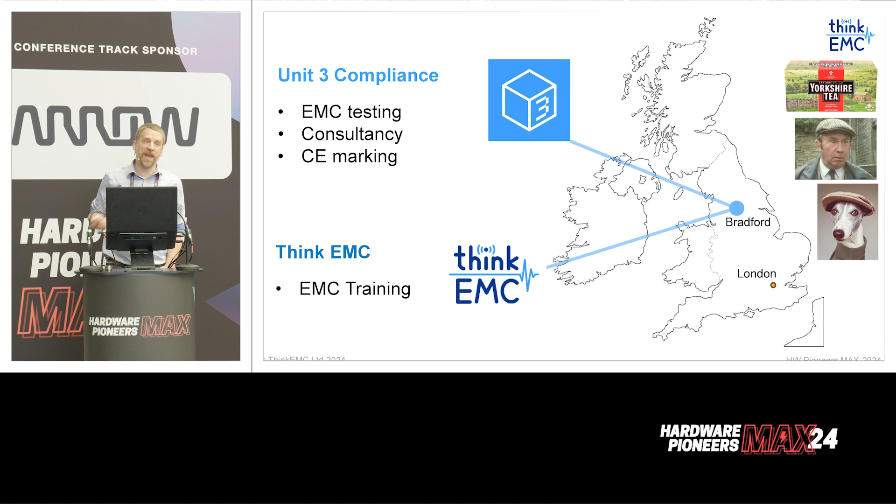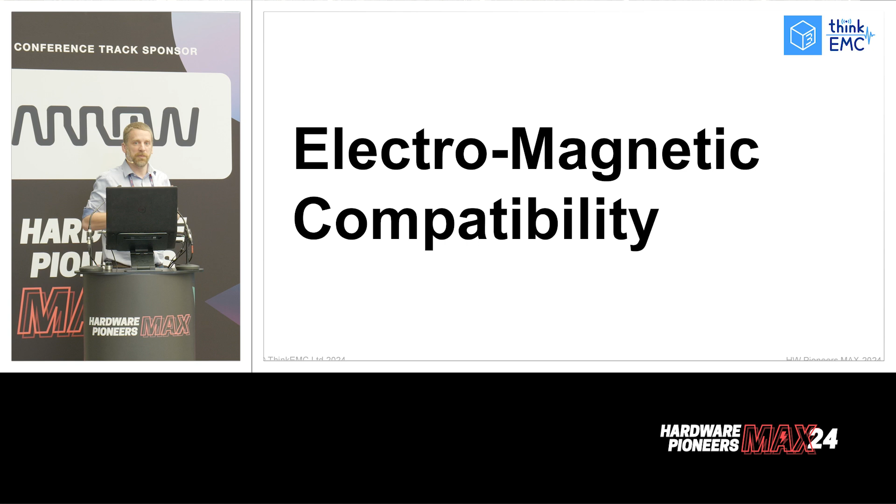I like electromagnetic compatibility. It is by far and away the single best job I've ever had in electronics. It encompasses so much physics, legal, regulatory, product design, compromises, thermal, you name it. EMC has an effect on it, and it will have an effect on EMC as well.

It's a measure of how compatible are products that we make, how compatible are they with the electromagnetic environment that they're operating in. Electromagnetic environments vary greatly between the environment that we're in now, maybe with a few radio transmitters, to, let's say, in a car or on an aircraft carrier. They're very different.

EMC does not stand for easy money consulting. It is the hardest job I've ever had. It also does not stand for end of my career. I'm still working in this field.

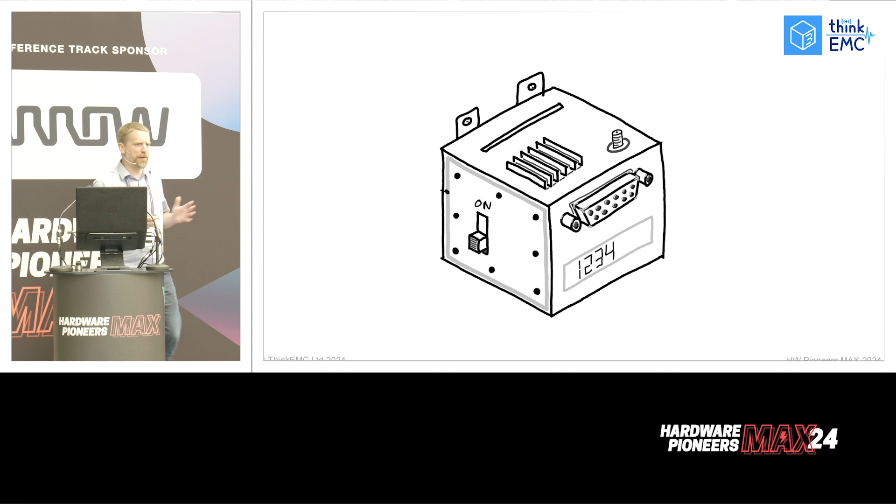We make things. We make things that do things with electronics in, hopefully. If you make things that don't have electronics in, may I suggest you're probably in the wrong talk.

When we make things with electronics in, they have the ability to emit interference, emit noise in the radio frequency spectrum, be it radiated or conducted on cables. And they also have the ability to receive noise in the electromagnetic spectrum. How does our product react when it receives noise? This is the study of the field of electromagnetic compatibility.

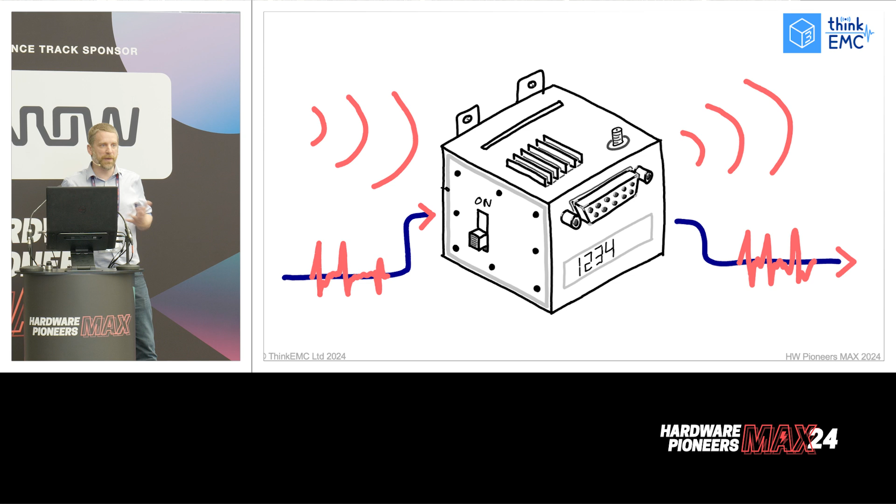We have the potential to cause interference to other licensed spectrum users. Licensed spectrum users like emergency services, amateur radio, air traffic control, space communications, military. Some of these people are going to be very, very annoyed if you tread on their toes. They're going to be so annoyed that they will actively prosecute anyone who's found to be trespassing on their bandwidth.

Mobile phone operators are famous for this. Mobile phone operators, Vodafone, O2, Orange, or EE as they are now, I don't keep up to date, they actively prosecute, they actively track down any infringement with their radio bandwidth. So if you are going to cause an interference problem, just avoid the 1.7 to 1.9 gigahertz spectrum. That's my top tip for the day.

But their enforcement powers go all the way up to legal enforcement. They can legally compel you to remove your products from service to perform mitigating actions.

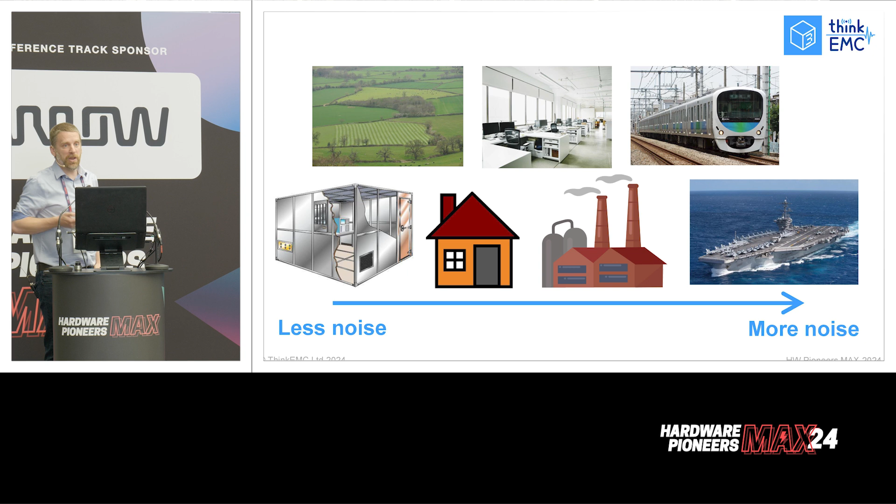From the immunity perspective, we have to consider where our products are being used, in what electromagnetic environments those are being used in. So we have the concept of a controlled electromagnetic environment, a shielded room. No noise gets in, no noise gets out. This is like the EMC chamber that we take our products to be tested.

A field in North Yorkshire is pretty quiet from an electromagnetic perspective, unless sheep are radio controlled these days, which I don't think they are. Contrast that with the flight deck of an aircraft carrier. We've got incredibly high-powered radar systems, electronic warfare systems. It's a very hostile environment for our electronics to work in.

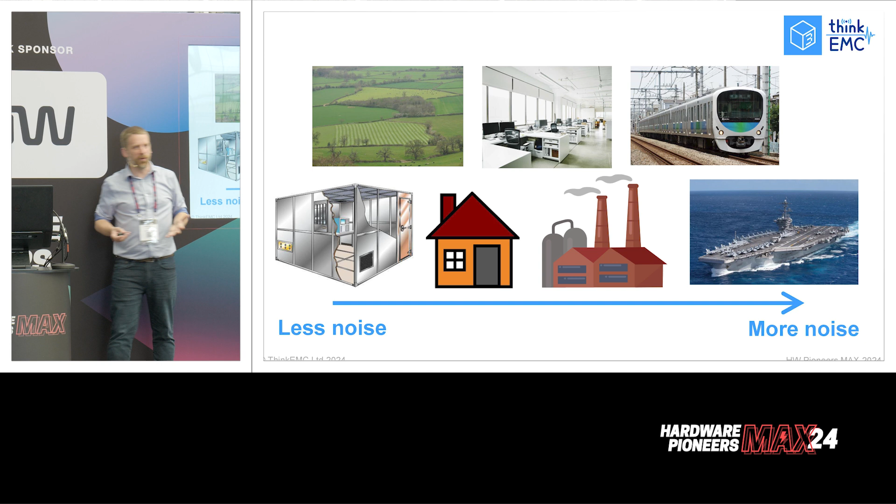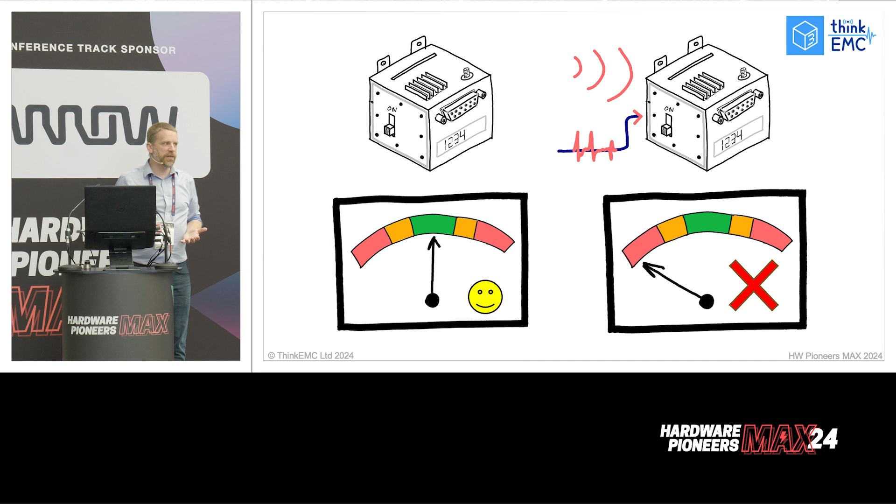So we have to know what environment we're designing our product to go into. The problem with immunity is when our product is on our bench in a laboratory and everything's working fine, we're very happy with that. As soon as we introduce noise, what happens? If we've not designed our product correctly, performance will change. We're looking for the performance to stay within the manufacturer's guidelines, our specification for what the product does.

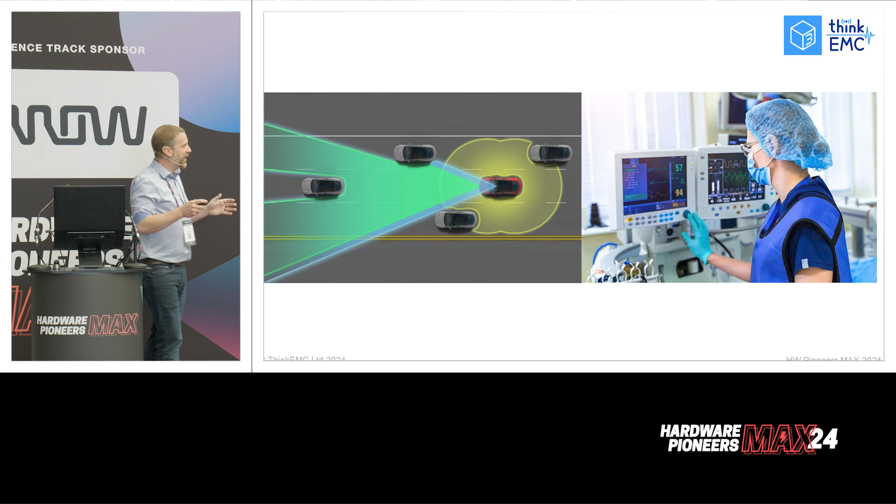There can also be a functional safety aspect to EMC. Imagine I'm driving my self-driving car down the motorway and my phone goes off. All of a sudden the self-driving car detects there's a truck in front of me and puts on the brakes. There was no truck - it's electromagnetic interference from my phone into the car systems. That could cause a massive accident on the motorway.

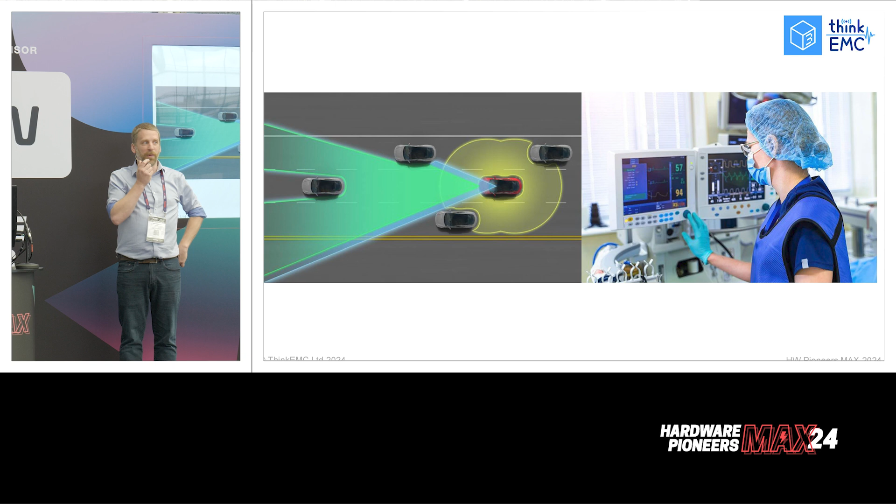Medical devices - we don't want to be in intensive care on life support systems and have a security guard come into the operating suite, key his radio and say 'yeah it's all right mate, it's all quiet in here,' and my life support system turns off. So whenever there's a functional safety aspect to EMC, our immunity levels, the noise that we inject into our systems, have to be proportionally much higher.

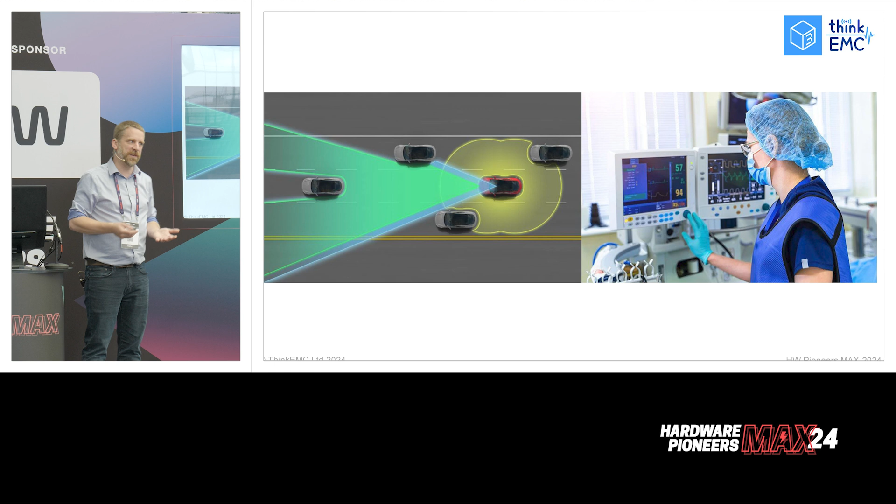Really, the main problem with poor immunity performance is it's not the regulators that are going to come to you and say your product is interfering with this or your product is low quality. Your customers are going to let you know. Your customers are going to be the ones that give you the 1-star review - oh, I tried to connect it but the USB kept disconnecting every time, or it just picks up random interference. It's a rubbish product, it's a low quality product.

That's the perception. This can also be perceived as no fault found field returns. We put something out into the field, the customer has problems with it, we get called out, we get it back, we put it in the lab, we don't see any problems - because we've removed it from the noise source that was in the field. So characterizing our products before we sell them as to their performance with electromagnetic noise is very, very important.

So EMC is an environmental test specification, just as we design something to have adequate thermal performance, adequate mechanical rigidity for the environment it goes into, adequate electrical safety. We have to treat it as such. We put it into our specification, we design to it, and we make sure we test and verify so that it is compliant, it's going to pass, it's going to operate correctly in those environments. It's easier said than done.

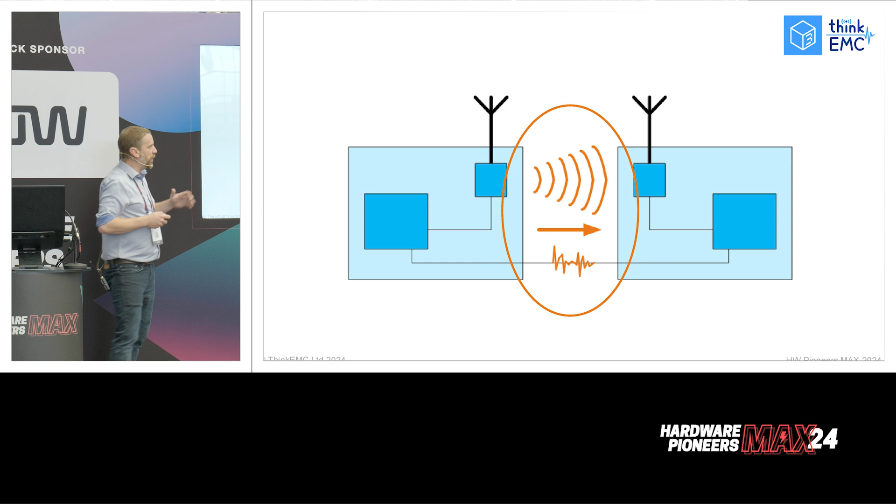EMC regulations are very concerned with inter-system interference - the interference between this laptop and the microphone, the interference between a mobile phone and a car. So we're interested in our system and how it reacts with other systems, either receiving noise or transmitting noise.

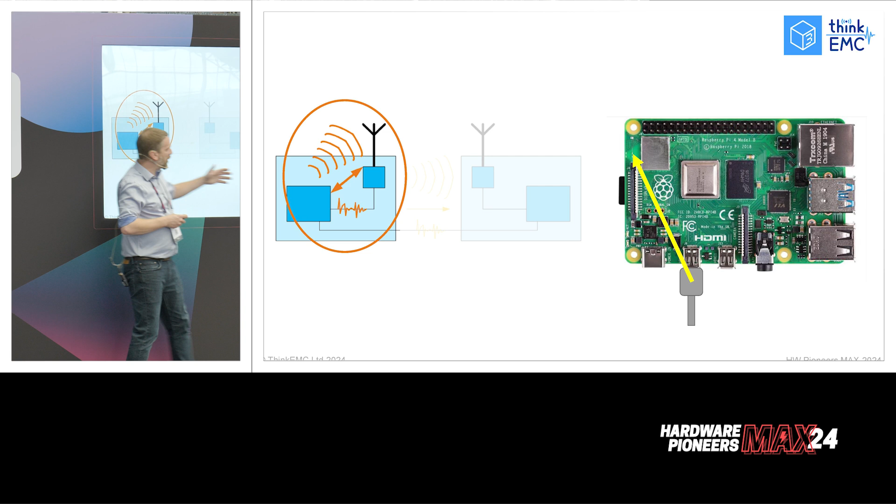There's also the concept of intra-system interference - interference within the same system that we've designed. Now it's not an external system we're worried about, it's internal components interfering with other internal components. For instance, a common case is poor quality HDMI leads causing in-band interference with Wi-Fi, all on the same board. This could pass the EMC emissions tests, but it will not give us a good quality product.

We have a swear jar at work, and if anybody says to us 'oh but EMC, it's all black magic,' they have to put £1 in the swear jar. EMC is not black magic. Sometimes it can be quite complex, it can be quite hard to understand because we're dealing with elements that we didn't explicitly design - parasitic elements that exist within our design that we now have to try and deal with.

There's also nothing magical about the colour green and yellow. If we see green and yellow, that's there for an electrical safety reason, it's not there for an EMC reason. It can have an effect, sometimes good, quite often not.

Really, EMC is a test of what works on our bench. Does it work in real life? So we can design something on our bench in a relatively controlled environment, but does it survive in the real world?

And it's also a really interesting game. We're playing a game because we all work for companies. Companies exist to make money. We exist to make products and we exist to make money. There's a compromise, there's a balance. On one hand, we have engineering, we have legal, we have all of the things that make us do more compliance, and that tips the seesaw this way. We spend more time, more money, and more effort to make sure that our designs are compliant, that our designs are good quality, that they can survive in this electromagnetic environment.

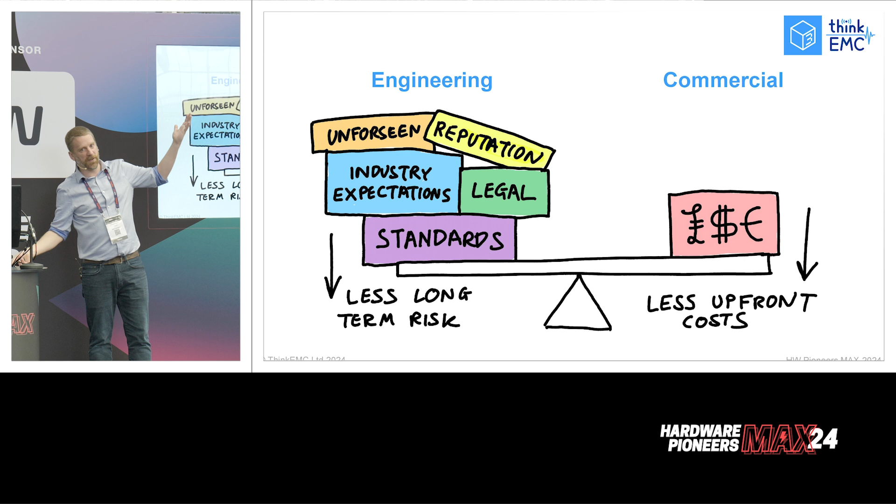Okay, let's look at some of the physics, because the physics for EMC is absolutely fascinating. I promise no equations. Well, not too many.

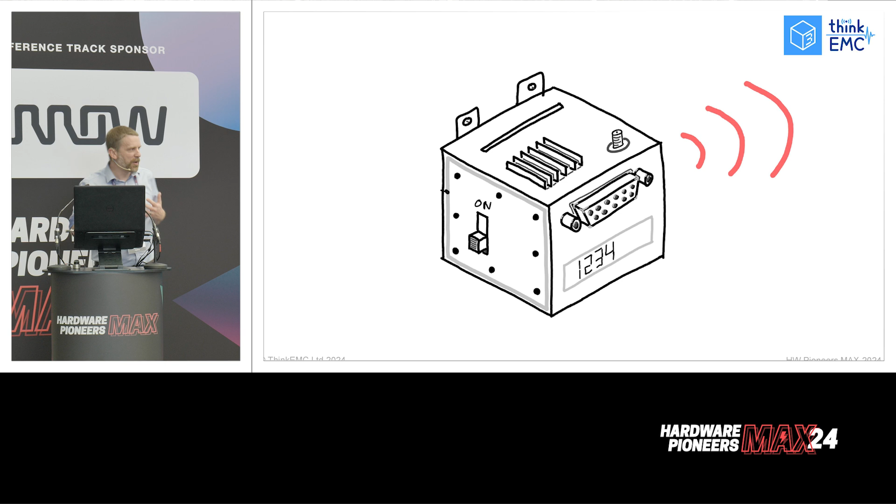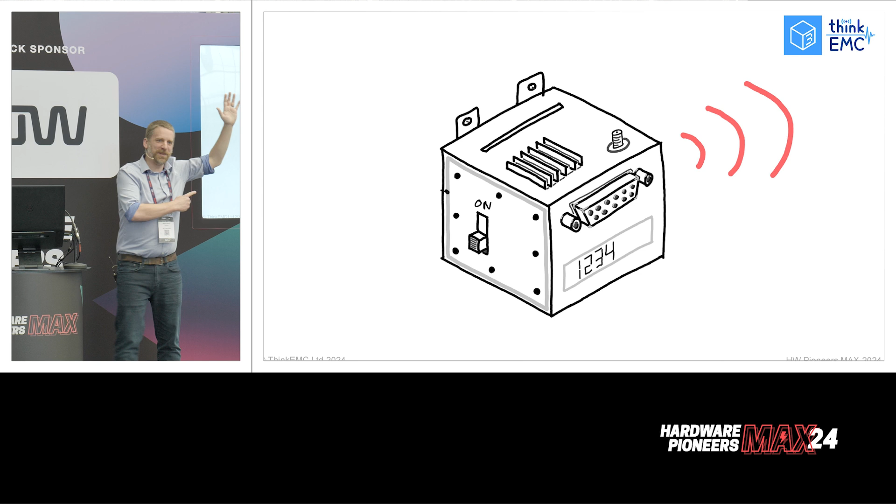For radiated emissions, where do radiated emissions come from? Quick hands up, who's had a radiated emissions problem with EMC? Okay, a good number of hands. Keep your hand up if it caused you significant cost and time delay on your project. You'll notice my hand is still up. £20,000 and 6 weeks in my case. I was not the program manager's favourite person.

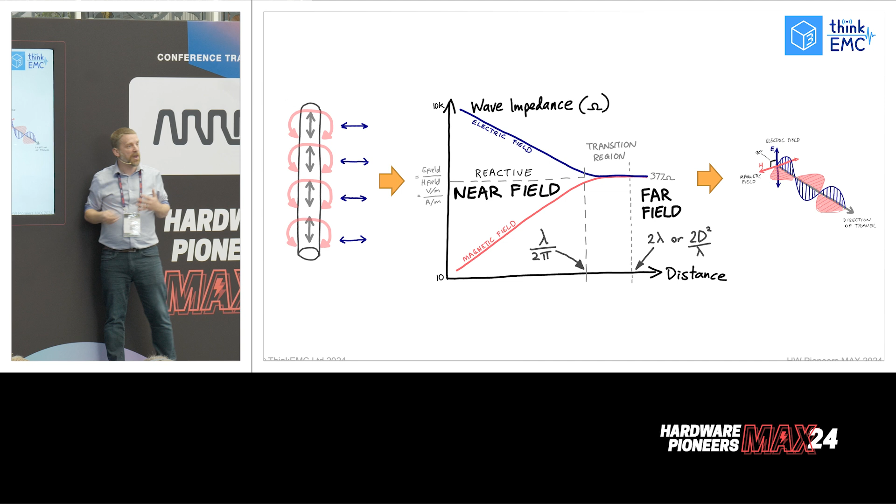Where do emissions come from? Fundamentally, high-frequency currents. High-frequency currents on a wire generate high-frequency magnetic and electric fields. And due to the beauty of Maxwell's equations, the further we get away from our wire that's carrying this high-frequency current, the electric and magnetic fields start to combine. If we're far enough away, we get a propagating transverse electromagnetic wave, a TEM wave. This is our classic radio wave that our mobile phones use, that broadcast TV uses.

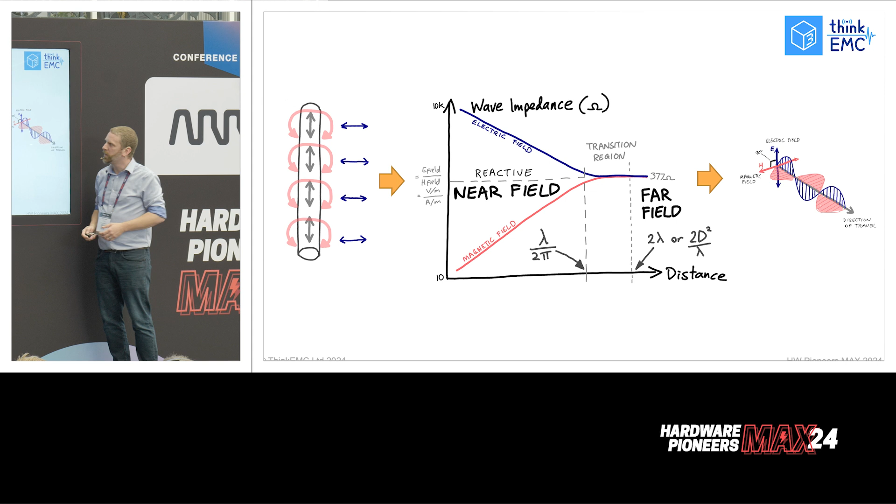But we have to be far enough away at different frequencies. At some point, this transverse electromagnetic wave is going to hit a receiving antenna. And when it hits that receiving antenna, what happens? We've got the chance for noise to turn into interference. So by designing our product correctly, we can reduce the amount of radio energy that we emit. This is fairly simple. This is textbook stuff.

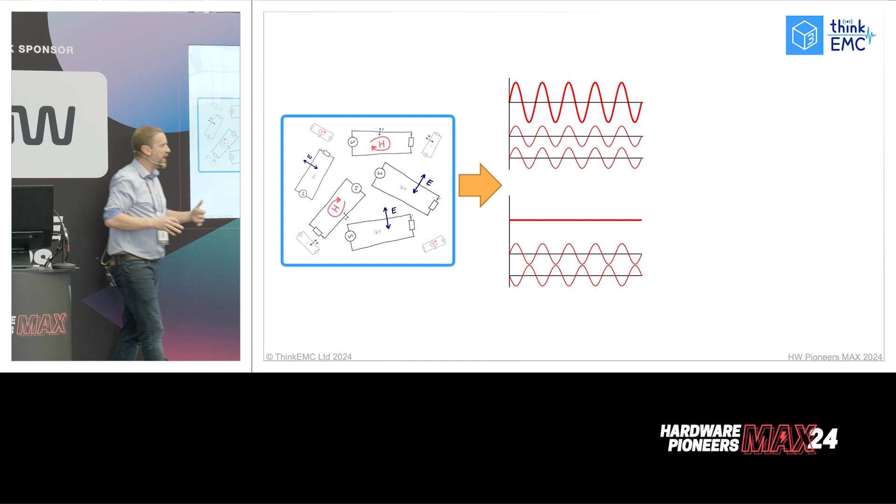The problem is that the products we make contain magnetic field loops that have high currents, high frequency currents, and voltage sources that have high voltage changes. So we would say this is a high di by dt loop, a high dv by dt node, fast changing current, fast changing voltage. They're all in different orientations, phases, frequencies, polarities. How they combine depends on what angle we look at the product. They might combine constructively or destructively, with phase addition or phase subtraction, or any combination therein.

This leads to quite a complicated radiated emissions pattern, which is why when we take our product and put it in the chamber, we do a 360-degree scan and we check our receive antenna in the horizontal and vertical polarization. We're trying to map the electromagnetic response from our antenna.

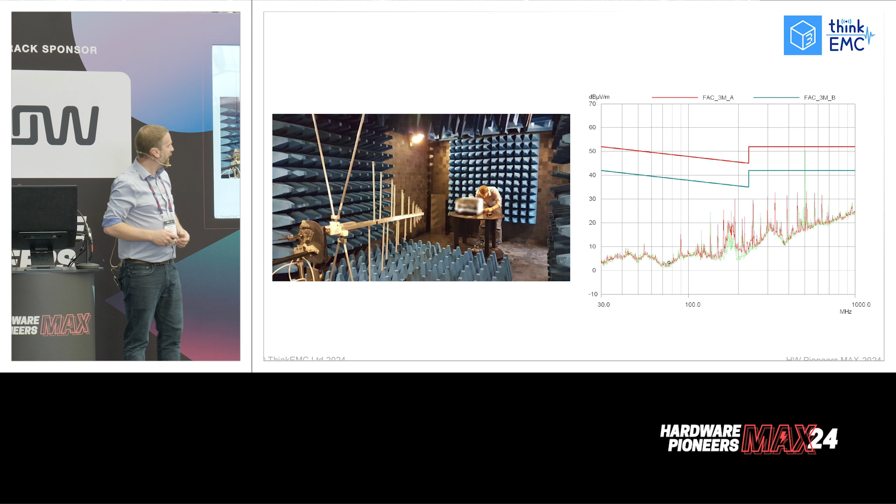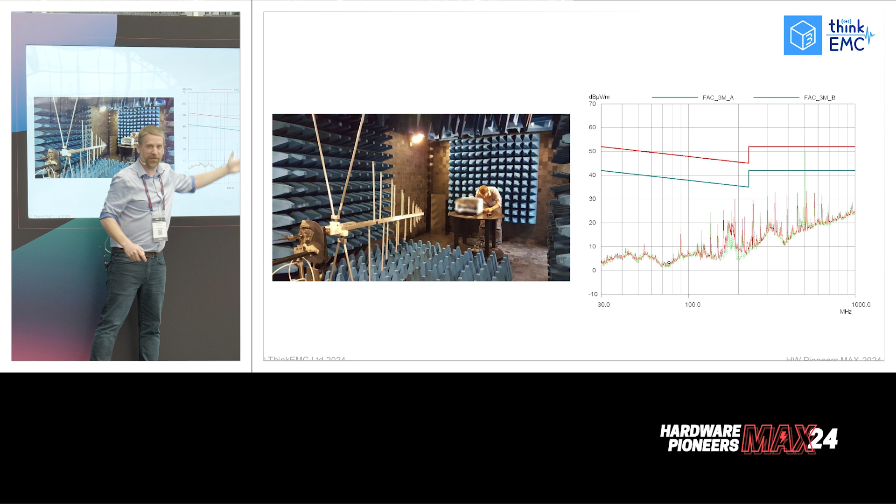We typically do this inside an anechoic chamber. This is our anechoic chamber at our test lab. That's a very young me—this is quite a few years ago, before I had grey hair. We're putting out the equipment on the turntable. We've got our antenna, we rotate it around, and hopefully we see something like this. This is a good scan result. It's not failing.

We also need to think about frequencies and wavelengths as far as radiated emissions go. We need to consider what the wavelength of our signal is, so that we can avoid designing accidental resonant antennas. This is very easy to do.

However, unlike that famous saying that oscillators don't, amplifiers do, it's very similar with antennas. You try and design an antenna to emit in a certain band, it's quite hard work. It's very easy to design a broadband, very effective antenna that gives us a lot of EMC problems.

We always think about the classical resonant dipole, two elements a quarter of a wavelength long, one element half a wavelength long. So we might think that at 100 megahertz, we need something that's 1.5 meters long. Actually, short antennas exist, and short antennas are very good radiators as well. Not as efficient as a dipole, but more than enough to cause us EMC problems.

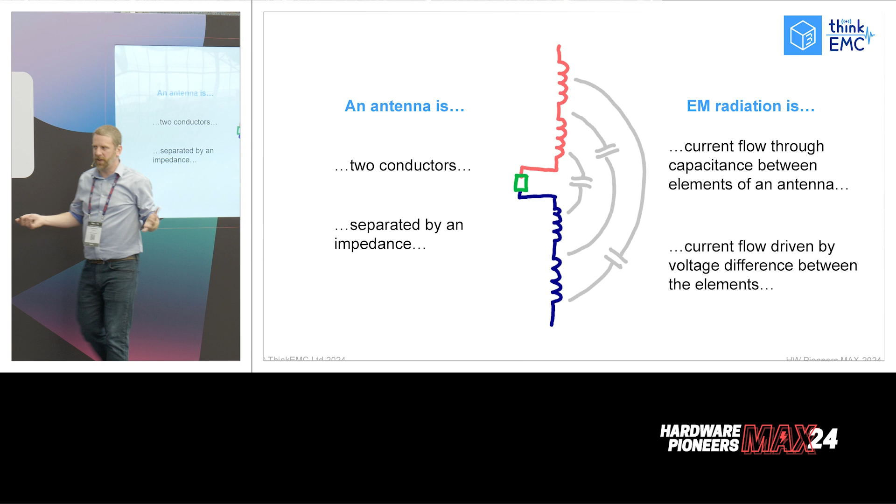So it helps to have a mental model of what an antenna is. I like to think of an antenna as two conductors, two pieces of metal. They're conductors with a finite size, so they can have a magnetic field around them, therefore inductance. Separated by an impedance, so they can't be at the same voltage. And there's a capacitance - we've got two pieces of metal that can establish an electric field between them. They can see each other.

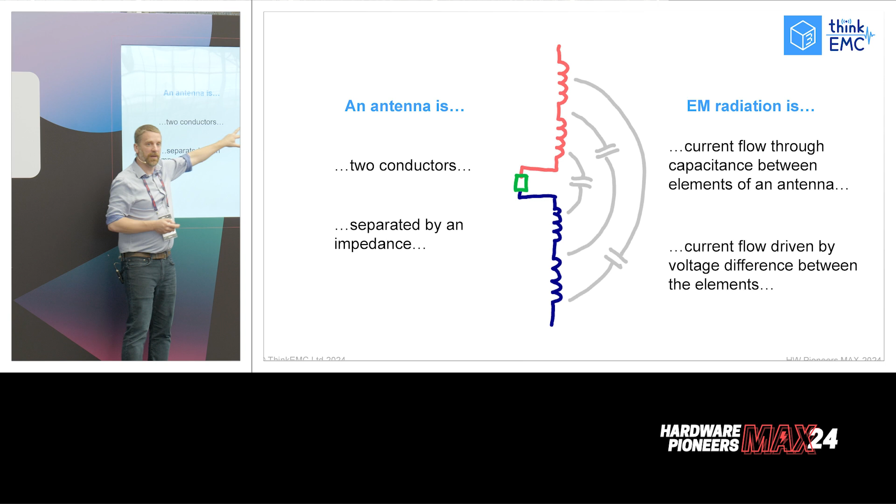We have a resonant circuit. L's and C's, it's a series LC resonant circuit. This is going to give us gain when we drive it at a resonant frequency. So we need to know where our antennas are in our products.

We think of a typical dipole antenna. You've got long, skinny elements, and they come together. So you've got one element like this, one element like this. That's our antenna. What happens if we change the shape of those antennas?

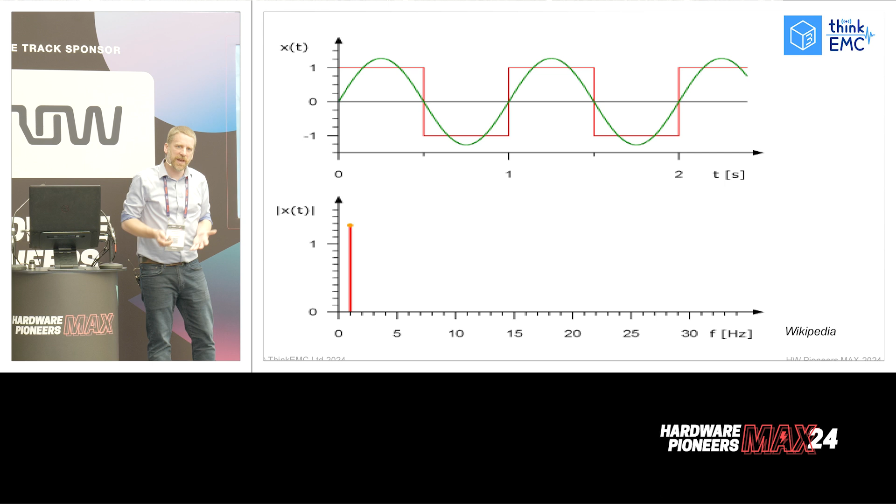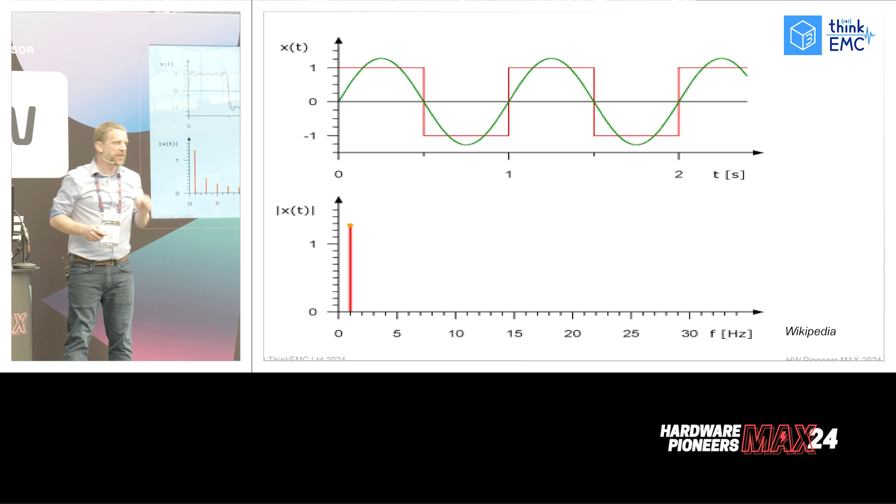And we excite our antenna with high frequency currents - or I should really say fast changing currents, not necessarily high frequency. This animation from Wikipedia shows a 1 Hertz square wave. No one's ever had EMC problems from a 1 Hertz square wave, right? Well, potentially we can. What you notice is, the faster the waveform changes from one state to the other, the more harmonics we have to add to get it to change quickly. So frequency is not necessarily the enemy, rise and fall time is.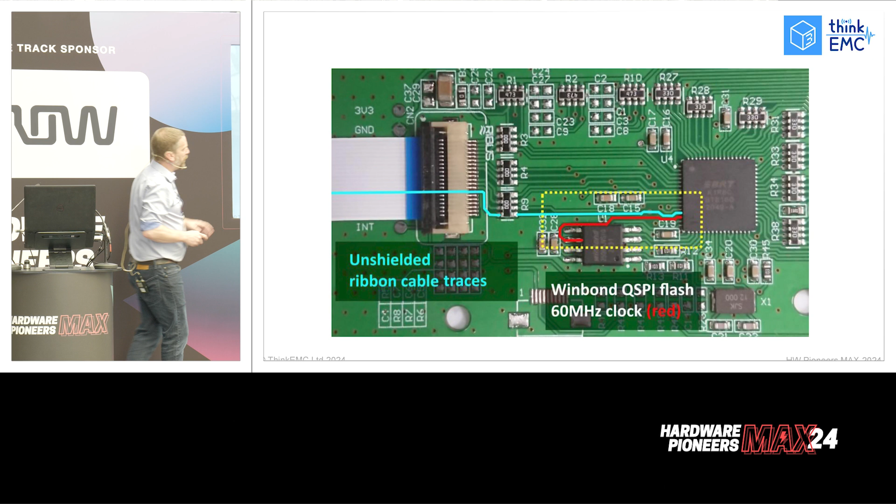It could be rise and fall times from an LCD display, an LCD panel that we took apart because it had some problems. Here we've got a 60 megahertz clock going to a QSPI flash, and a very conveniently placed trace right next to it. All that energy couples onto there, couples onto the cable, radiates from the cable.

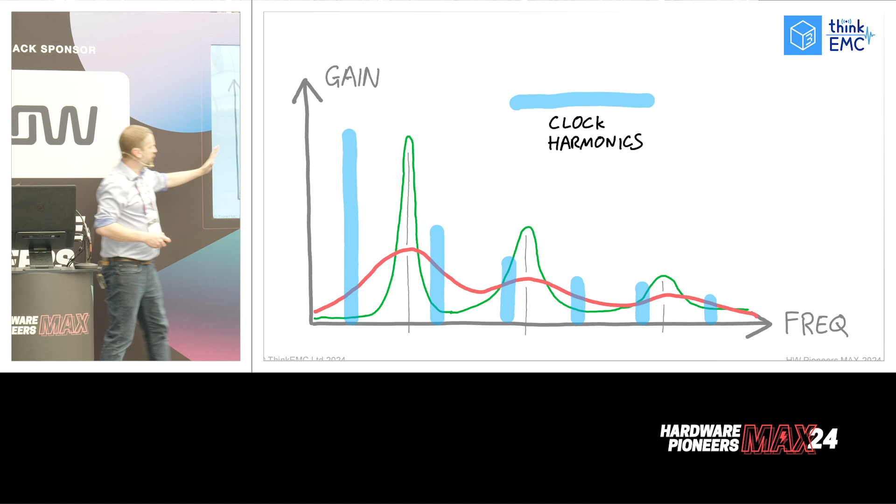It could be a very poorly designed DC to DC converter - again, another one of the things that we've recently fixed. All of these noise sources are going to put noise harmonics, our switching frequency, and integer multiple harmonics all the way through our spectrum. If any of these coincide with a point where we have antenna gain, we're going to have a radiated emissions problem.

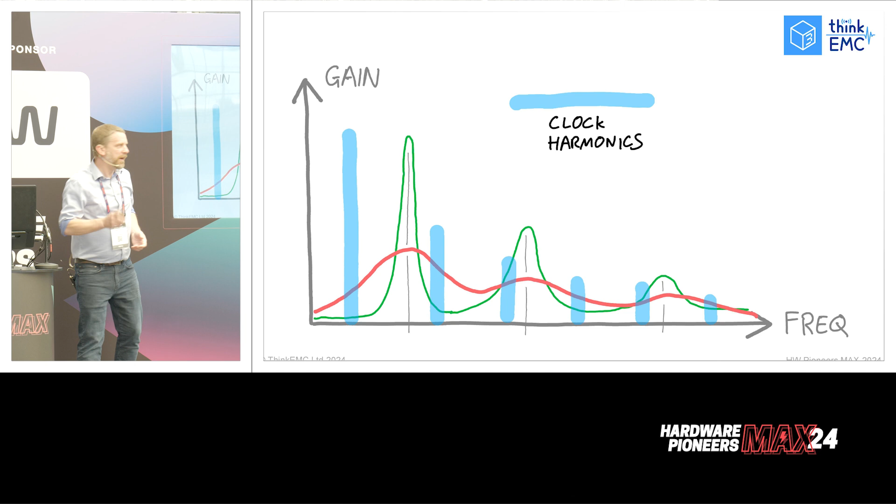Side note, it's also interesting - we need to check our equipment in different operating modes. We always think the highest frequency is the worst. Well, the highest frequency, in this case, isn't the worst. Maybe a slightly lower operating frequency is the worst - I'm now moving my third harmonic in line with a point where I've got more antenna gain. And that was the £20,000, six weeks mistake that I mentioned earlier. We won't talk of it again.

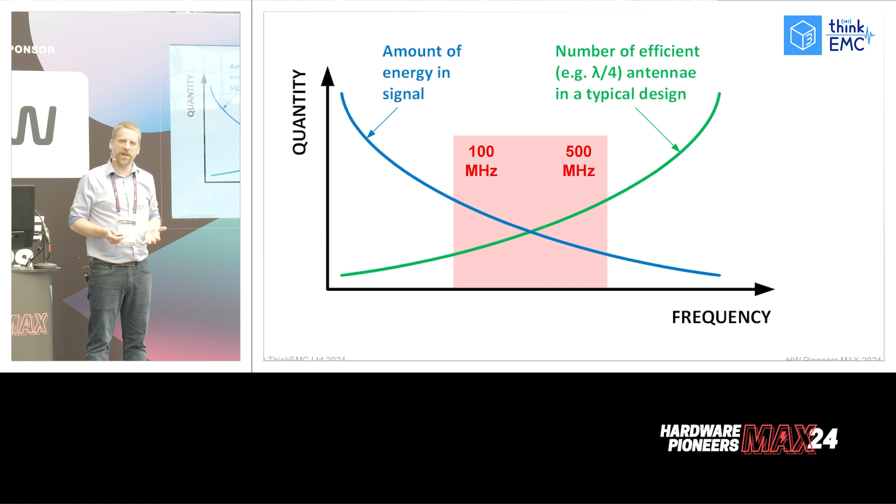So now we have an interesting compromise. We have frequency versus quantity. As we get higher and higher in frequency, we get more and more resonant antennas in our product, because our products are of a finite size.

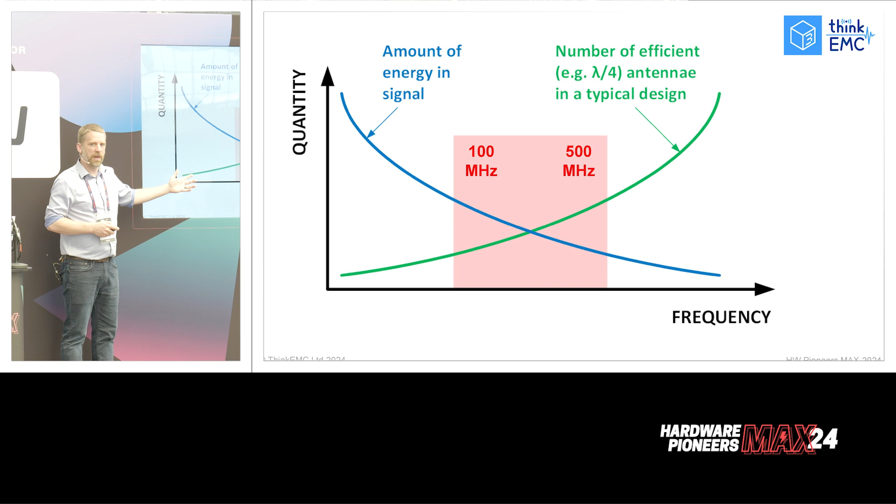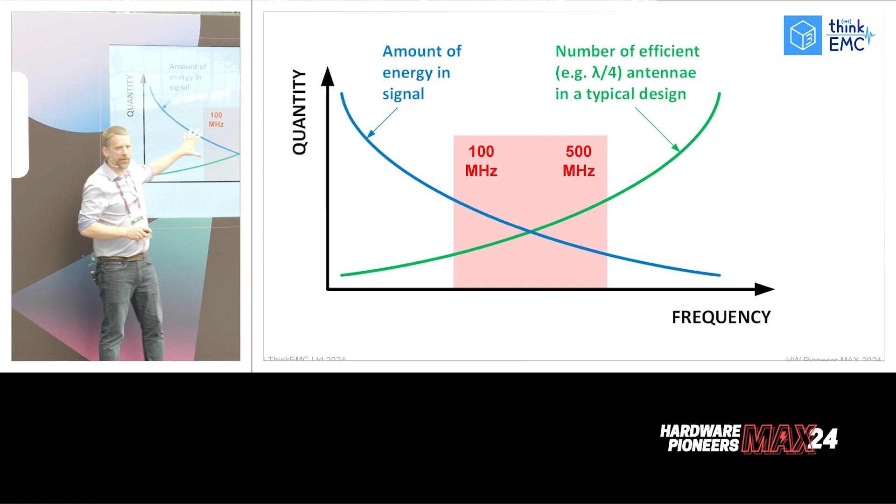As frequency goes up, our efficient antennas go up. We'll have more efficient antennas at 1 gigahertz than we'll have at 100 megahertz. So the risk of radiation goes up with frequency, but the amount of energy in our signals comes down with frequency. So here we've got a lot of energy but no antennas to radiate it, and here we've got a lot of antennas but no energy to excite them. So in the middle we have this danger zone, usually in the 100 to 500 megahertz band. For typical digital electronics, this is where we see the majority of our radiated emissions.

Conducted emissions: we're worried about long cables acting as efficient antennas. We're worried about coupling between circuits, either inductive coupling, capacitive coupling, or common impedance coupling. Typically it's some kind of power supply, switch mode power supply, flybacks, forwards, boost, buck converters. We're worried about noise from our noisy switching node coupling into measurement circuits, LISNs, that we use to characterize how much current is flowing on our cables.

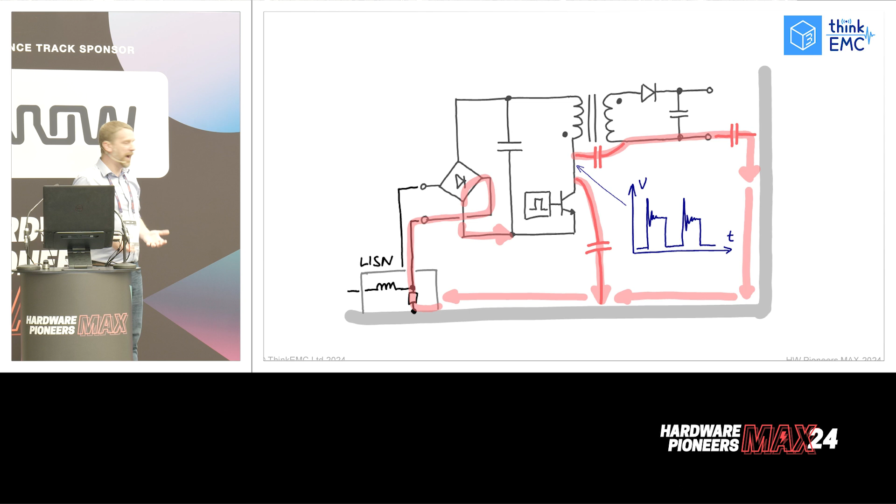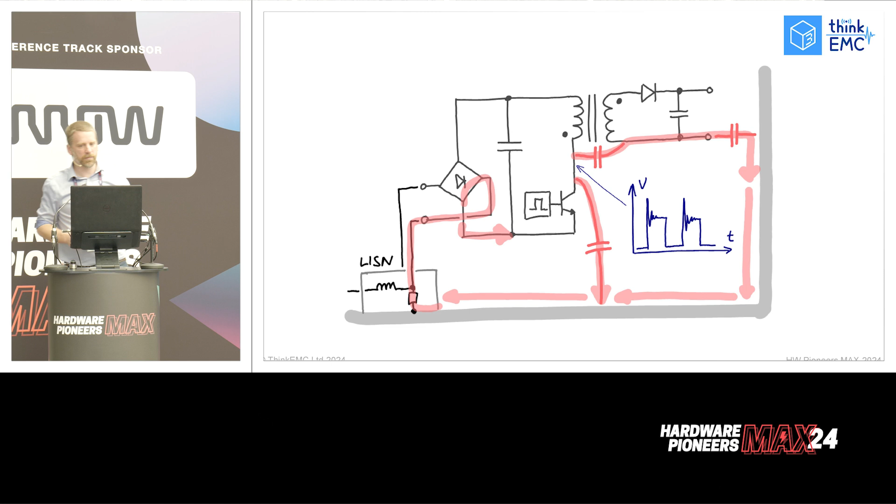Radiated immunity: how does it react to radiated noise through the environment? We're still designing the same antennas, ones that are as good at receiving as they are at transmitting. If our parasitic antenna has a gain of 5 dBi at 100 megahertz, that works in transmit, it works in receive. So this will easily put noise into our system.

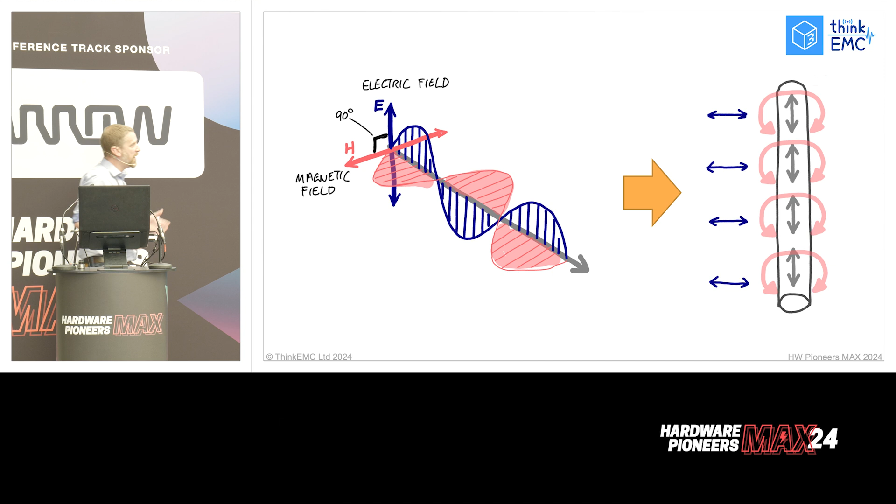Our transverse electromagnetic wave interacting with a conductor causes currents to flow on the conductor. This is the reverse of radiated emissions. If we design a system that's good for radiated emissions performance, we improve its radiated immunity characteristics.

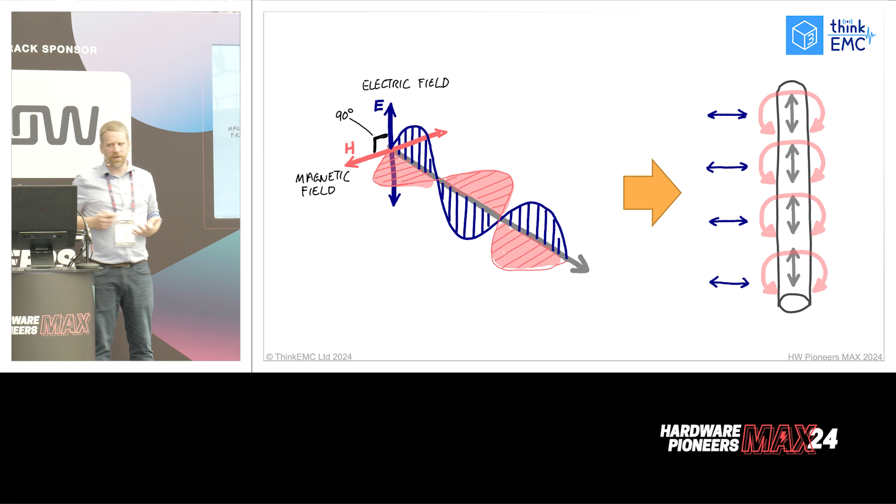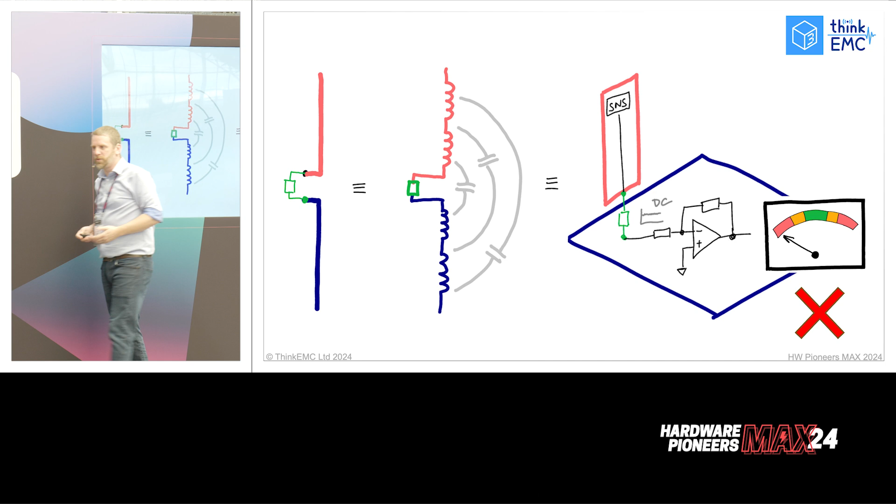But we also have to consider what's the circuit that's being excited by this noise. In the case of a simple op-amp with no filtering, whenever we hit that with electromagnetic noise, it's going to fail - the performance will deviate on the output. So now, for radiated immunity, it's not the amount of energy in the signal, it's the sensitivity of our circuits to this noise that we're receiving.

And again, we typically see radiated immunity problems most prominently in the 80 to 350 megahertz band. There's nothing special about 80 megahertz. Below this point, we start working on conducted immunity instead. It's easier to couple the energy into the cable directly.

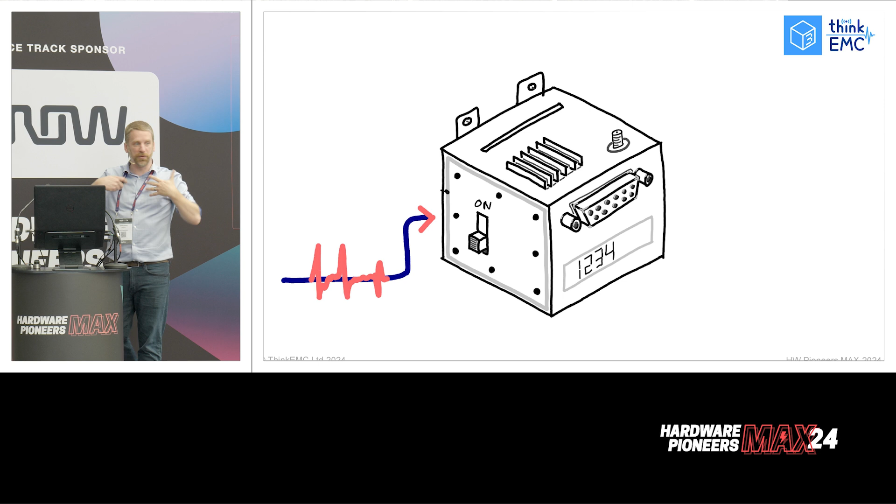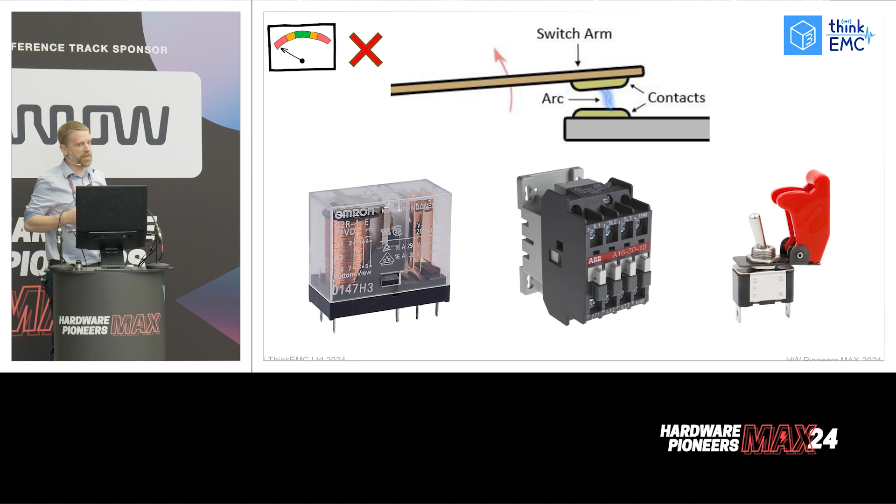So conducted immunity, we're worried about noise sources like variable frequency drives, a big broadband noise source, a very significant problem in that kind of system. We're worried about arc and spark noise from relays, contactors, electromechanical switches, contact bounce drawing an arc. That arc will couple capacitively onto other cables, it will spread, it will cause interference with digital circuits.

We're also worried about surges, lightning surges mostly, power surges. Lightning has kiloamps, kilovolts, very easy to couple large amounts of electric and magnetic fields into overhead power lines, and that ends up in our house and gives us some problems.

Some EMC tests, like ESD, actually present both a radiated and a conducted component, and depending on the frequency, depending on which part of the curve, depending on which part of the discharge model we're dealing with, that can be a surprisingly difficult thing to deal with.

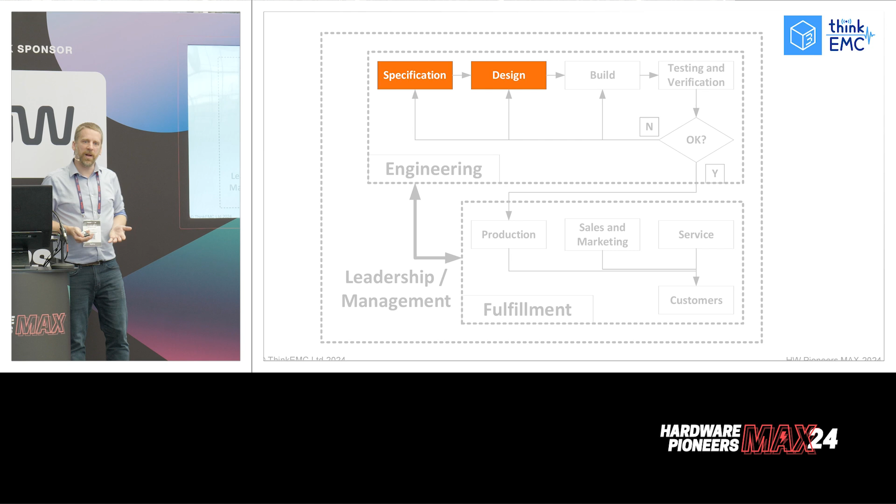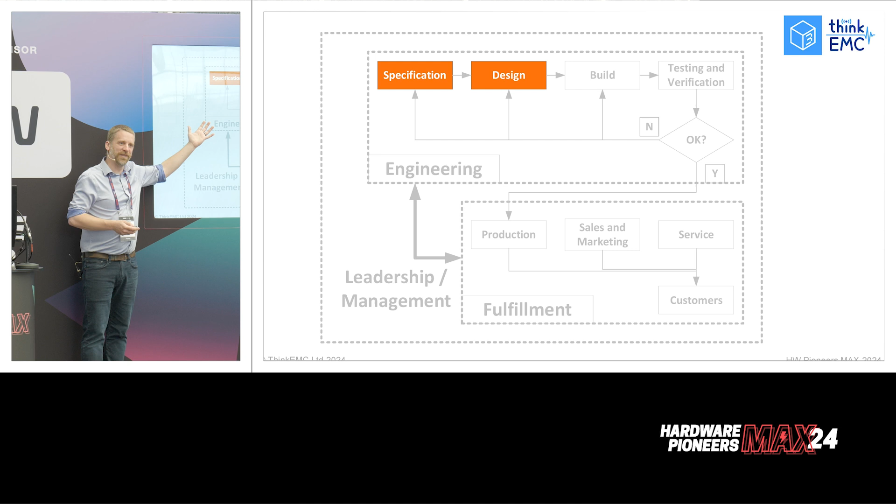It's been all doom and gloom. There are solutions. There are solutions to EMC. The first one is: we don't test EMC in, like we don't test anything in. Unless we've explicitly designed our equipment to pass EMC tests, it may not pass. We can't pretend to be surprised when it doesn't pass. Everything that we do is set at the design and specification stage. If this is mostly an audience of engineers, you already know this. Sometimes it can be a little bit hard to know how to design things in.

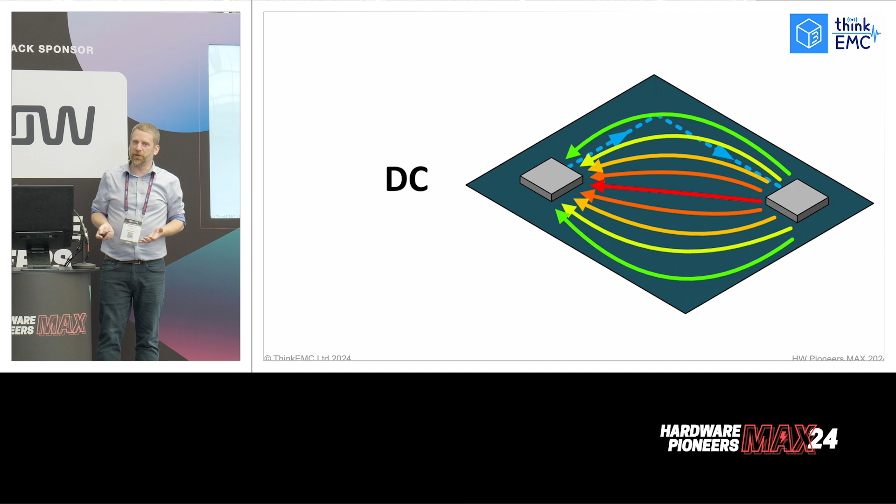The key tool in knowing about EMC is understanding where high frequency currents flow. I can see a few nods in the audience. You guys, you get it.

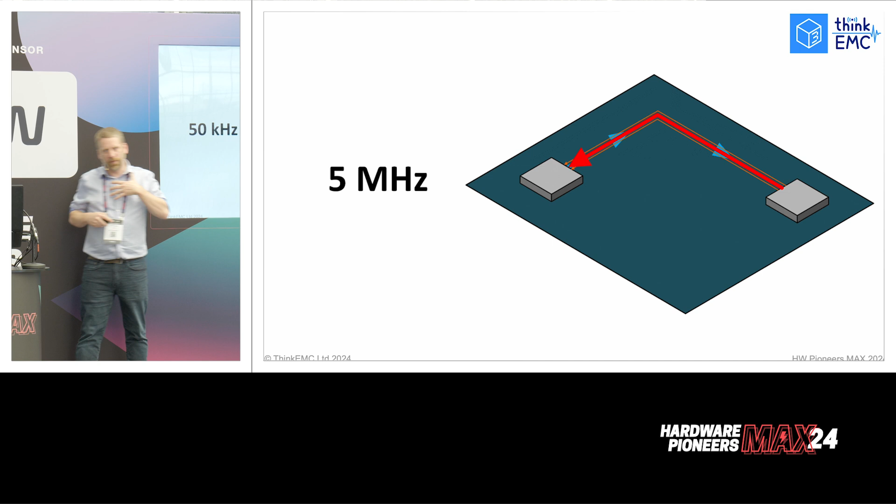As we go up in frequency, return currents in the ground plane of our circuit board start to follow the signal trace on the top layer. High frequency currents want to flow in the path of least impedance, defined primarily by the size of the loop and the inductance it creates. As EMC engineers and design engineers, we need to control our loops very tightly and not let the magnetic field caused by those currents leak out and cause emissions.

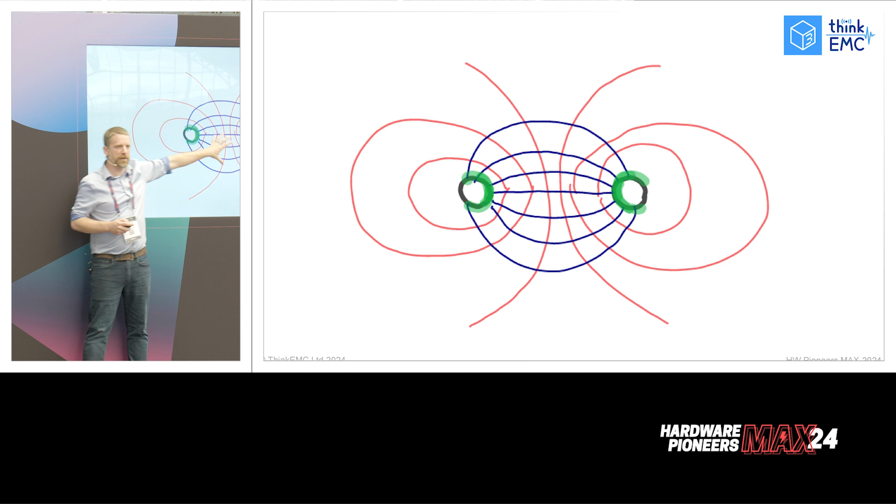We need to understand where fields exist between conductors. Two conductors carrying a high frequency current, the majority of the electric field and the currents are concentrated on the inside of that gap, trying to flow in the path of least impedance. Fields carry the energy. Current on a wire is just a symptom of a nearby field that's carrying the energy. Currents themselves do not carry much energy at high frequency. There are some fantastic YouTube videos on that.

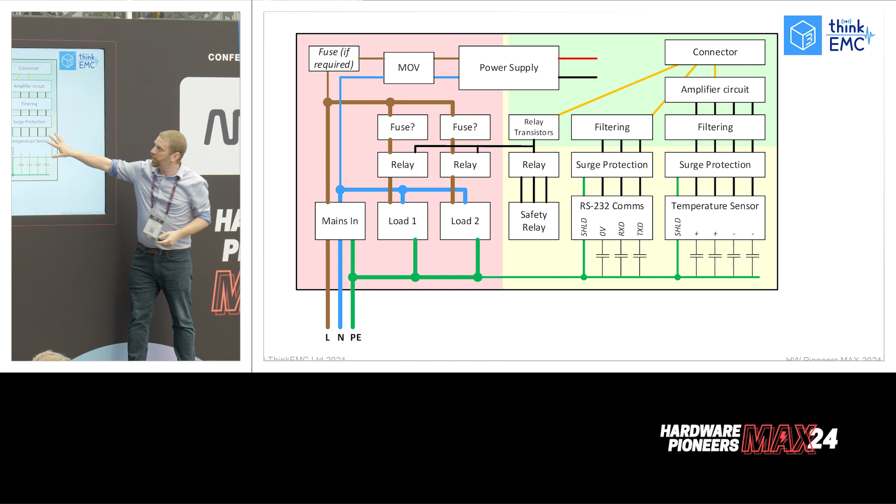Understanding how high frequency current flows allows us to design our systems. We can partition our systems and separate out parts, so we can have noisy components like power supplies and mains input separated from sensitive circuits like temperature sensors. This is a design review of a customer's product we did recently. They laid out their entire system and asked, can we do some testing? I said no, because it's going to fail. We're going to need to rework the design before we do any testing.

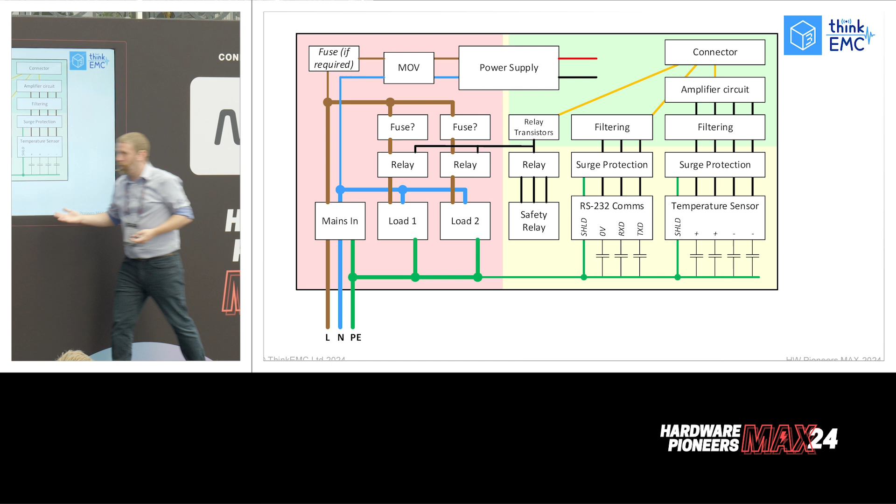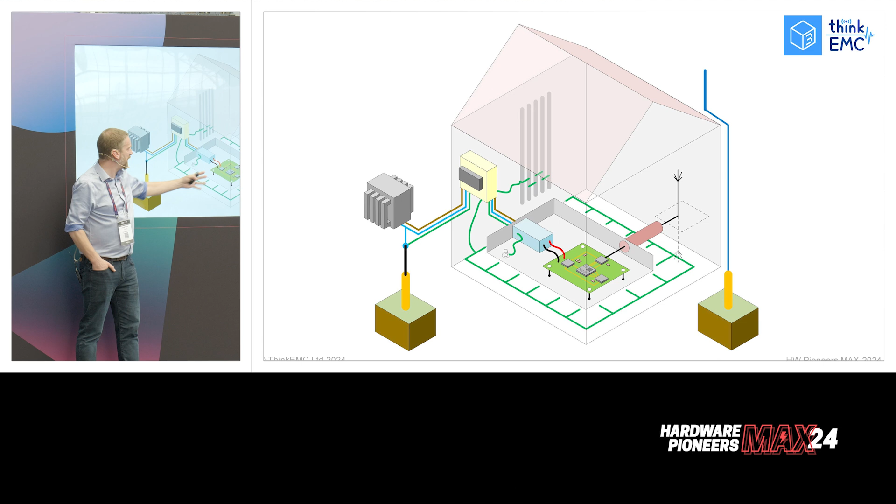We need to understand there's nothing magical about ground. Anything on this image could be described as ground, whether it's the bond into the earth at the substation, or the ground on our circuit board, DC negative. Where is ground here? Ground is not some magical hole that we can sweep all of our electrons into so they go away and stop causing us problems. It's just another conductor, a return conductor. We need to treat it with respect.

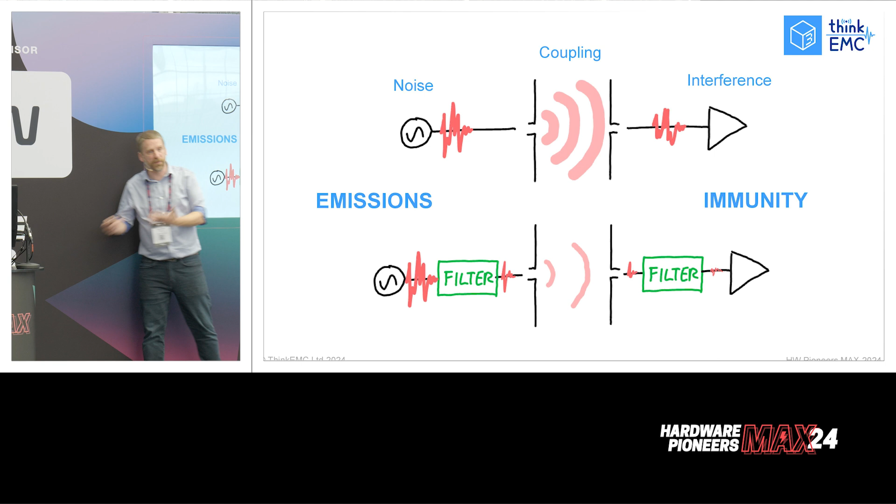When we have noise that will couple onto another circuit and cause interference, we can add filtering. We can deliberately design filtering to reduce the amount of noise radiated from our circuit, reducing the noise that goes to the structure that's going to couple. We can also add filtering on our inputs that reduces the amount of noise coming into our circuit and turning into interference.

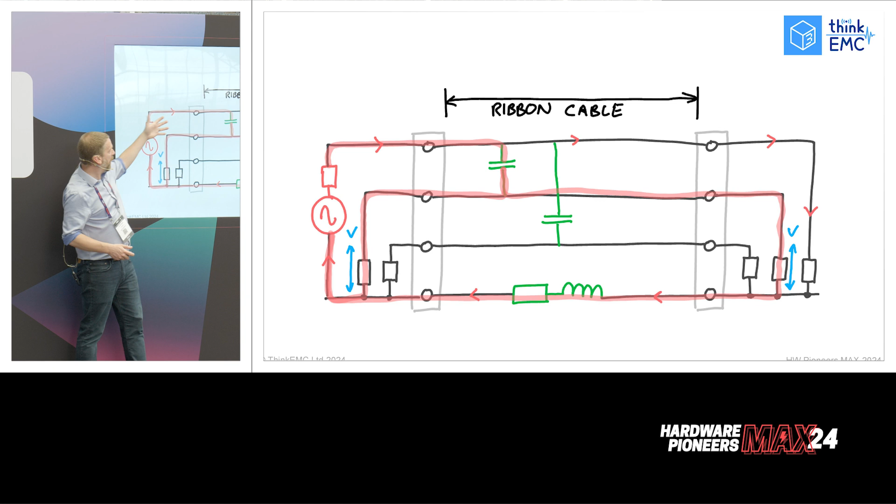So we need to understand coupling mechanisms as well: inductive coupling with shared current loops, capacitive coupling where two pieces of metal that can see each other force a displacement current through a capacitance, and the lesser-spoken-of common impedance coupling, where multiple circuits share the same ground wire. Any voltage drop across there appears in series with all of the other circuits. All of these convey electromagnetic energy from one circuit to another.

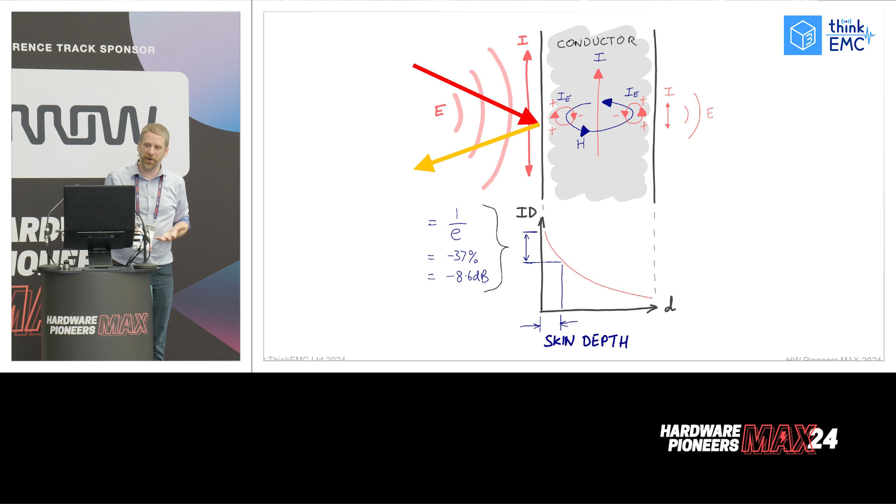We need to understand shielding. How does shielding work? How do we make a good shield, and also how do we break a good shield? I've worked on products that have had full metal enclosures with massive holes drilled in them and cables passing straight through. The shield's there, but they're not using it correctly. How do we design our enclosures to keep electromagnetic energy bottled up within and to reject any electromagnetic energy from outside our product?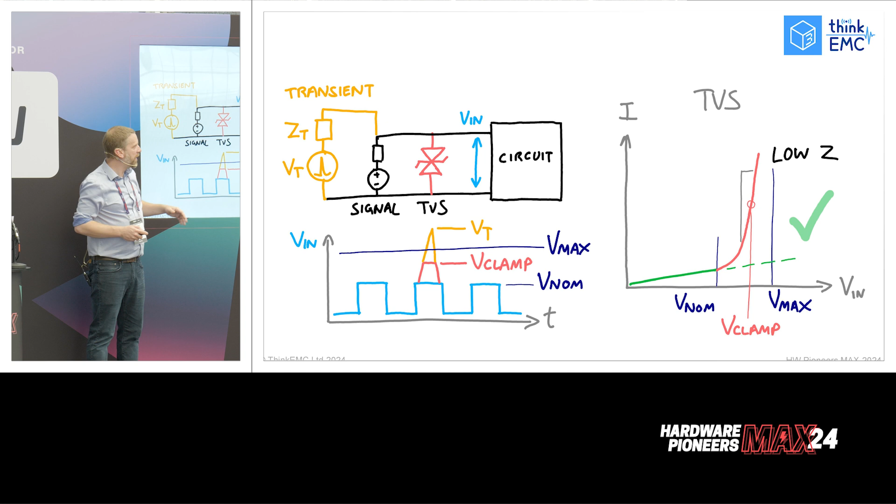How do we design transient voltage suppression? We've got long cables that are going to be subject to lightning surges. Designing transient voltage suppression to clamp any voltages below the threshold of damage to our circuit is also an important factor.

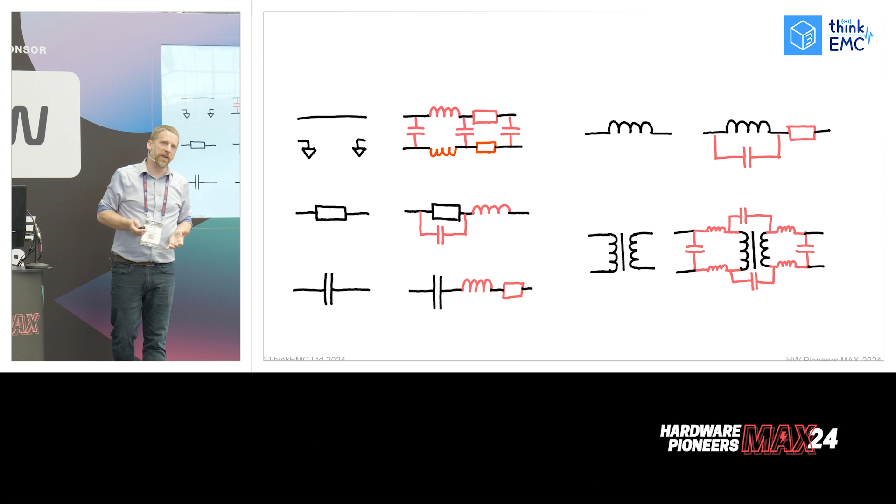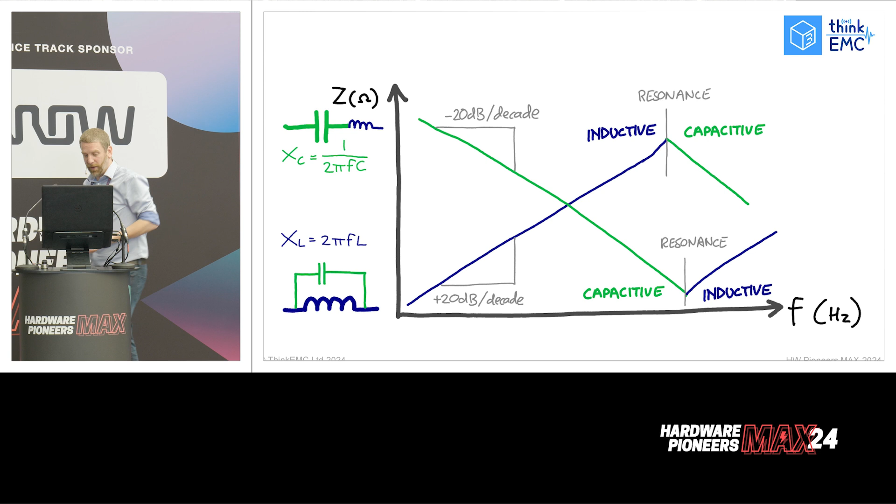Another important factor is where parasitic components exist within our circuit. When we design circuit diagrams and schematics, we'll draw a wire and ground symbols. That's a poor reflection of the complex transmission line structures we actually put onto our circuit boards. Unless we understand that these parasitic components exist and their effects in terms of impedance on that circuit, we're going to have a bad time and not have a good design. The danger is that any differential mode inductances can turn into common mode noise as our high frequency current seeks lower impedance paths.

The one tool that I would always recommend, says the man who runs a training service for EMC, is EMC knowledge. It's the one thing you can always take with you. At your next company, you might not have a spectrum analyzer, you might not have the tools you need. But if you know how to design for EMC, you won't have any problems. It's the one tool you can't leave behind.

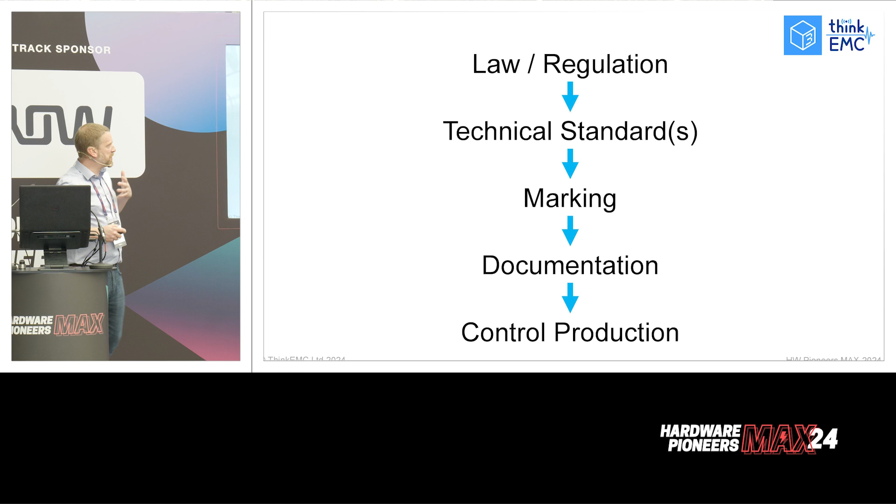Quick word about the law, and there have been other presentations about this, so I will be brief. Wherever we want to sell our product, in whatever marketplace around the world, there is some kind of EMC regulation. We often have to comply with technical standards that help us demonstrate we're compliant. We have to apply some kind of mark to our product, and there's often a documentation requirement as well.

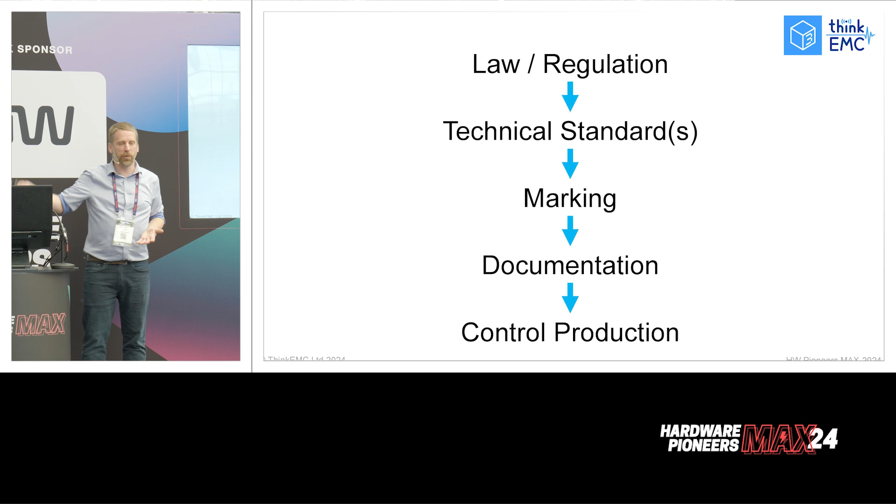We also need to control production. The sample that we tested - well, if we've made 10,000, is the 10,000th sample the same as the one that we tested? I hope so. If not, how do we perform an assessment between the two? A full reassessment, partial, there are lots of options.

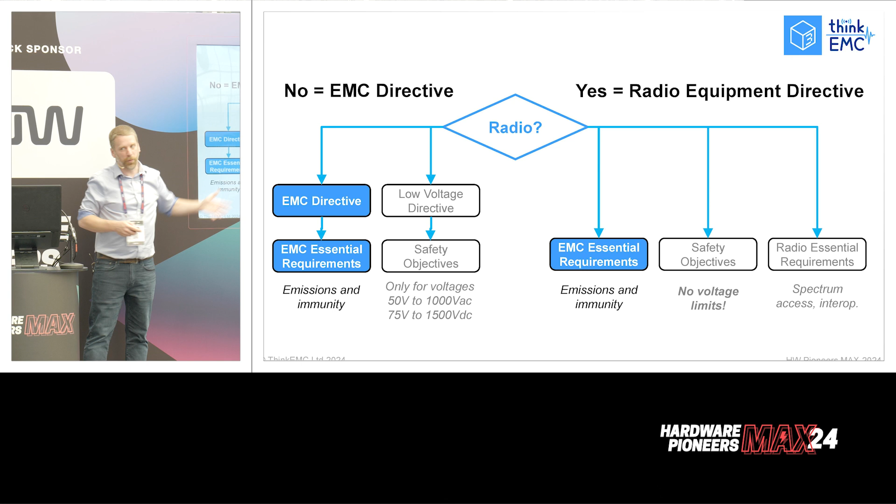Thankfully, due to international technical standardization, there's very similar requirements across the world for electromagnetic compatibility - similar emissions levels, similar immunity levels. The details may vary, but broadly speaking, they're all the same thing. For instance, in Europe, we either have the EMC directive or the radio equipment directive that ask us to perform EMC tests. This is a legal requirement that we perform an assessment.

The process of EMC risk management or EMC specification is also surprisingly in-depth. We have to take a lot of inputs - the marketplace that we want to sell in, what are the directives, the laws that we have to comply with, standards. We have to consider what its intended use environment is.

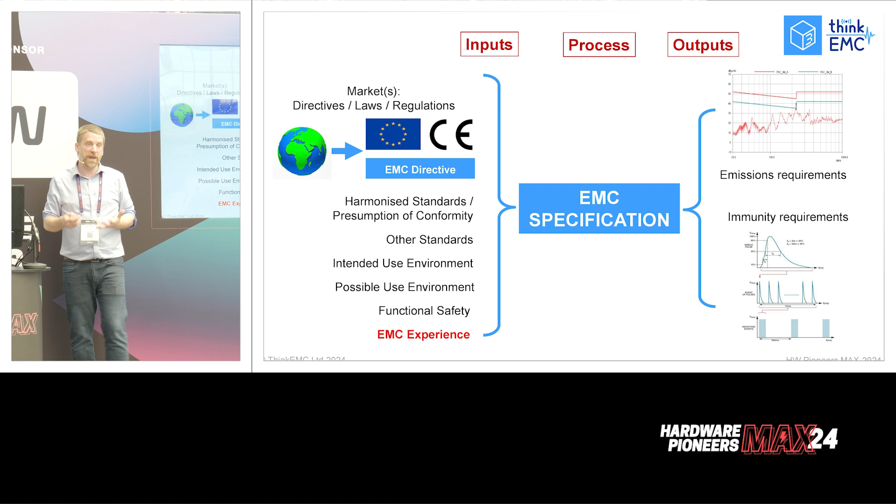The home, okay, great. But what if someone takes a computer designed for the home and puts it in their factory next to a large variable frequency drive system? All of a sudden, it's foreseeable, but not intended use. Do we design our product for that or not? Is there a functional safety aspect? What experience have we had with EMC? We take all this and we churn it up together, and eventually we come out with a specification for emissions requirements and immunity requirements for our assessment.

In Europe, we have to provide a declaration of conformity with our equipment. This is the legal document where you put yourselves on the hook for the compliance. There's no formal certification in this respect. We have to compile technical documentation that proves we've done enough work to be compliant. There may be certification involved, depending on your environment. Not everything needs certificates.

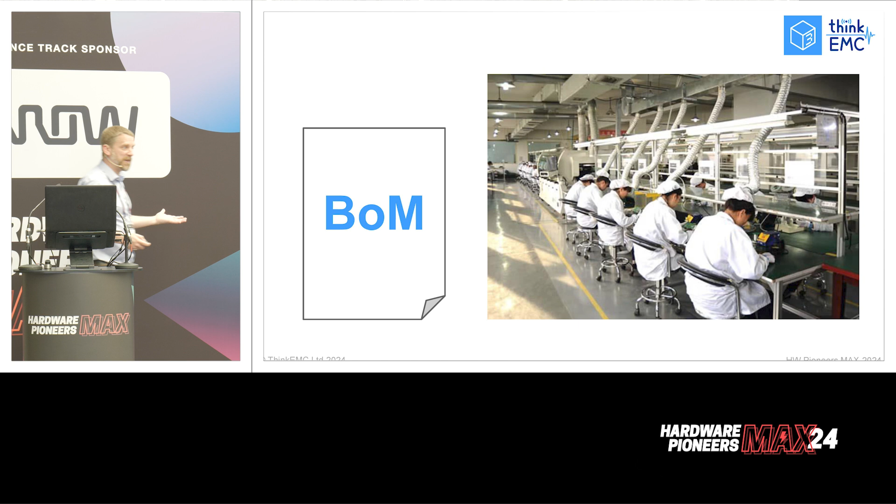And we need to control our bill of materials, with EMC critical components clearly identified on the bill of materials. We need to control production. No, I'm sorry, we can't route the wire this way - it has to go this way, otherwise it's near the noisy thing. Okay, good, you got it.

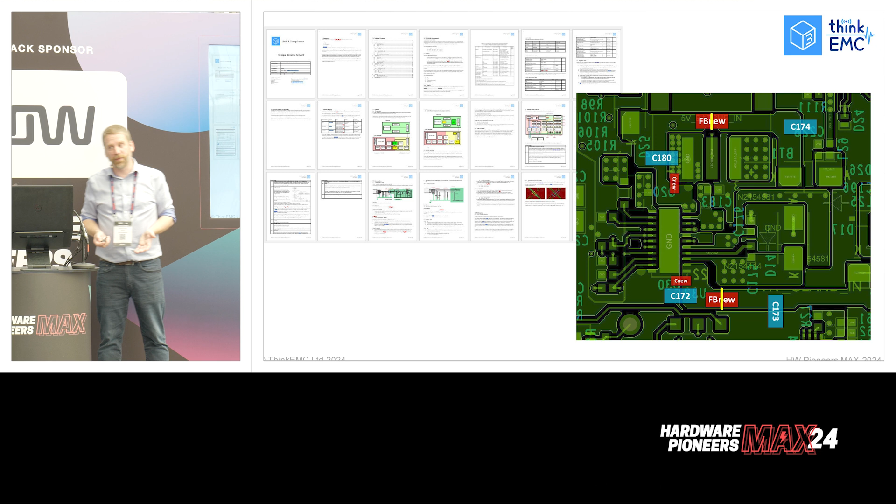We perform EMC testing. We perform EMC problem solving. One of my best successes - a 50-watt buck boost DC to DC converter - we went from this to this, like almost a times 100 improvement in performance. That was 3 new surface mount components, and the rest was circuit board layout.

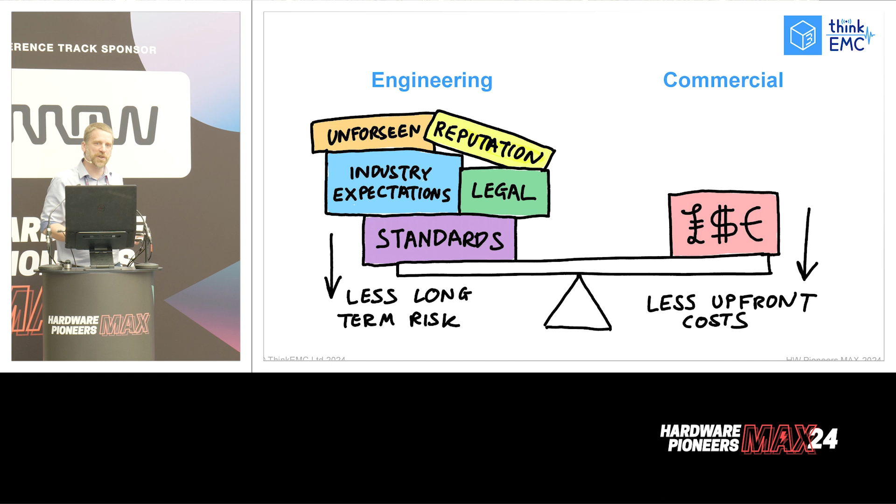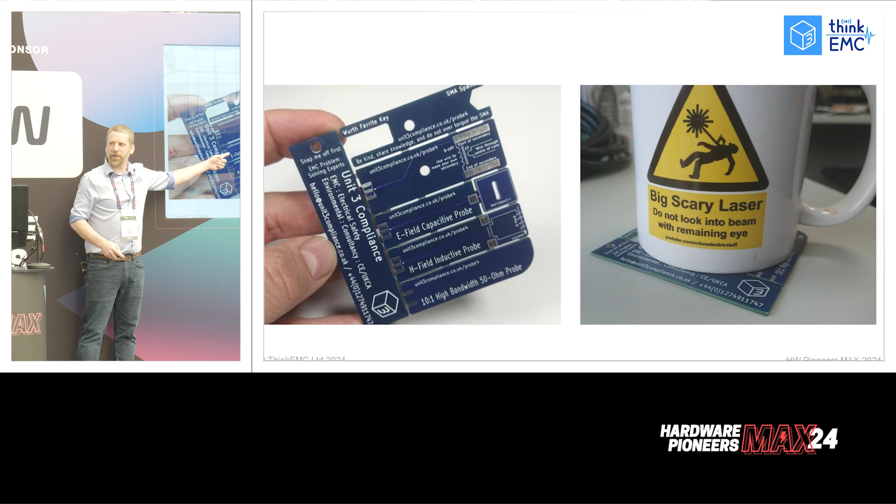EMC doesn't have to be scary. And with a bit of knowledge, you don't have to be scared either. Thank you very much.